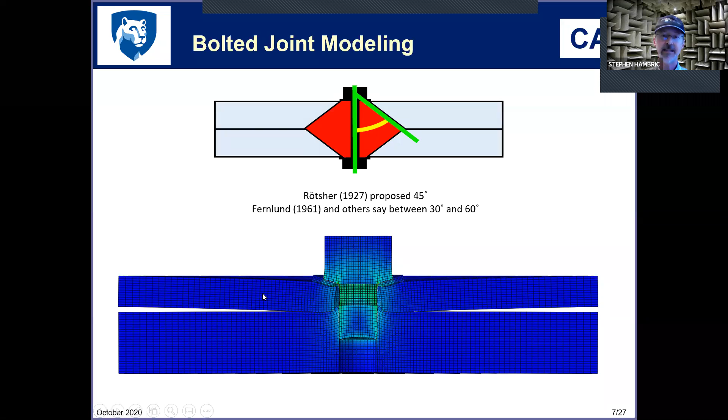You do wind up with a fairly well-connected region just around the bolt, which looks like it's got a frustum kind of shape to it. But look what happens away from the bolt. The material actually pulls apart. So you're compressing here, but you're pulling apart outside here.

And if there's an adjacent bolt a certain ways down, which is quite typical, then that would clamp down and you would have this kind of open region around it. So you wind up with all these sort of localized connected regions and then open regions elsewhere, which was frankly a surprise to me when we first started looking into this.

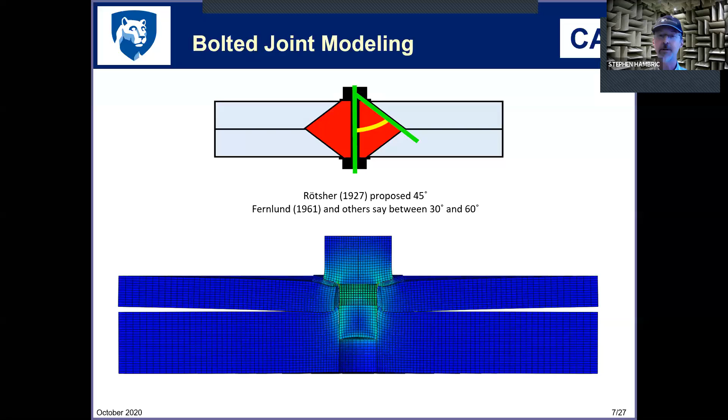So what Trevor wanted to do was go through and predict this sort of behavior and also measure it. So he did a bunch of measurements, starting with just looking at the contact pressure region. What does that contact region look like? And he did those measurements using an ultrasonic probe.

And so here are a couple of plates with a bunch of holes in them, and you can kind of see where we did most of the bolting. These actual holes are in fact for pins to make sure that the structure didn't move as we were doing the testing. And we had a kind of a control opening here where we didn't have a bolt, and then the bolt over here on the right, because when you use ultrasonics, you never get a perfect measurement.

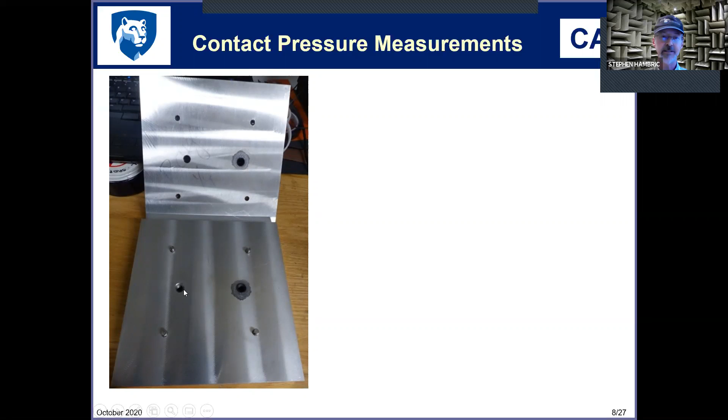The whole idea here is to take a probe, and now we're looking at the plates bolted together along the side, and then run the probe along the surface and get a 2D scan of what the contact pressure looks like over this entire region. And what you find is that you get a highly localized contact region around the bolt and then very little contact elsewhere. And the way you can tell that is by looking at the reflections that come off of the surface.

And if you get a strong reflection, that means you do not have a whole lot of contact. If you get a weak reflection, that means that the ultrasonic wave goes all the way through to the bottom of the total bolted assembly and comes back up the other side. And so what you're looking for is essentially the reflection from the interface. So you can tie the strength of that reflection to how tightly bonded that surface is.

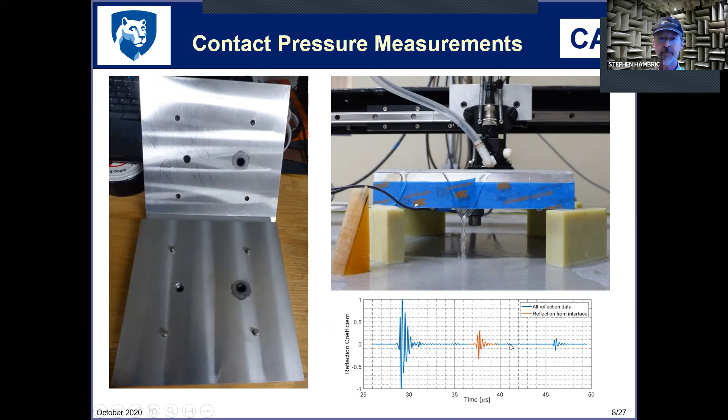And when you do these scans over the whole surface and then do some manipulation with the ultrasonic reflection coefficients, you can get these nice contours of what that region looks like. So on the left is what you get when you have no bolt at all. And so the reason we include this is it's an ultrasonic probe. The waves disperse a little bit when they're sent in. And so you don't get this perfect reflection. You wind up with kind of a smeared reflection.

So when you look here where there's no bolt at all, you wind up with something that looks like you got something along that bolt, but you really haven't. So we want to compare that to what's happening along the bolted region. So here you wind up with very little reflection along certain regions, very high reflections in others, and you get a highly localized contact region here. And you can convert that to an actual pressure.

And once you have the pressure, you can further convert that to something called an interfacial stiffness, essentially what that localized spring constant looks like around the contact region. And so the way Trevor's plotting this is we start at the origin, the center of the bolt hole, and then move out to the edge, and then continue on beyond that up to about 3 radii.

The black is essentially your noise floor. That's what you get without a bolt at all. It'd be over here to the left. So this isn't real. This is just an artifact of the ultrasonic measurements. But over on the right, the colored dots are what you get around the bolted region. And you get a much higher stiffness as you get closer and closer to the center line. That's where the pressure is highest. And as you move further and further away, the pressure and the corresponding stiffness go down even more.

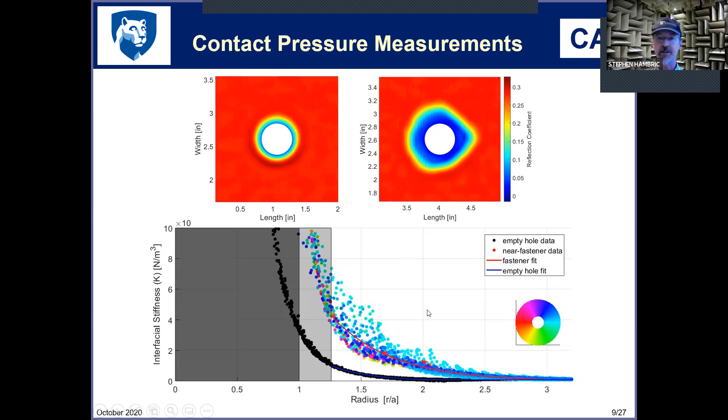So the next set of tests he did, and we're actually showing you simulations here because they're easier to visualize, is of 2 bolted plates. And so we built 2 of these with different lengths and different flanges. So this is in fact 2 different flanges bolted together at 2 locations. Trevor did a bunch of modal tests on these plates and pulled out the resonance frequencies, but also pulled out the damping. And I'll show you in a minute that he looked at what happens to the frequencies as well as the damping when you vary how strongly you excite these structures.

And as we looked at the results, it became pretty clear that we had 2 types of modes and 2 types of behavior at the joint. And so this first type of behavior is just a bending motion. And if you zoom in on the flange, I've got a bolt here, we're just showing one of the bolts. As the plate vibrates, you wind up with this sort of slapping region here. In this particular instant in time, as the mode shape is pulling down the ends, the flange pulls itself apart. And we don't have it shown here, but if you move forward 180 degrees in phase, these ends will move up and this region will slap together.

And so that's a nonlinear response. And so you wind up seeing these periodic impacts in that first bending mode when you get it moving pretty strongly. And then the stuck region, what we're calling the no-slip region, is right here, really close to the bolt, as we showed you with the contact measurements.

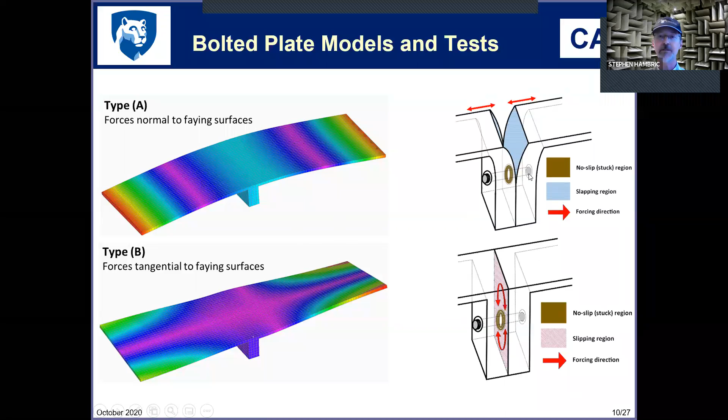So we looked at various ways of modeling those kinds of joints, and you can do them using those crazy detailed nonlinear models I showed you a couple of slides ago, but that is very painful and not something you want to do. And so Trevor went through and evaluated several different simplified linearized ways of modeling the joints, in particular the bolt spring constants.

And you wind up with springs for the bolt itself, and then you wind up with another spring along that contact annulus as well. And there's different ways of modeling those, and I'm not going to go into the details, but Trevor tried a whole bunch of them and arrived at one that he liked the best. And if you're interested, you can look for the thesis. If you go to the CAV website, we have a link to student theses, and if you just plug in Jerome, it'll pull up a link to his thesis you can download and have a look at all of the different models that go behind these curves.

But the way they were evaluated is you put the experimental frequency on one axis, we chose the X, and then his model frequency on the other, we chose the Y. And then if you have perfect agreement, then you wind up with a line that essentially just runs down the diagonal of this plot. Of course, nothing's perfect, but some models work better than others. And again, have a look at the thesis for the model that worked best for Trevor.

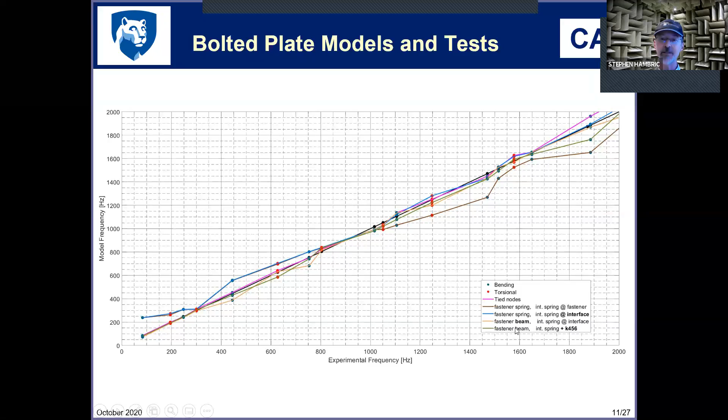A big challenge that he never did come through was looking at how the damping varied with vibration amplitude, as well as the preloading that you apply to the bolts. So I think I mentioned that it's quite common to torque up your bolts to about 2/3 yield, but not everybody does that. So Trevor went through and looked at 3 torques: low torque, medium torque, and high torque, and he defines that in the thesis.

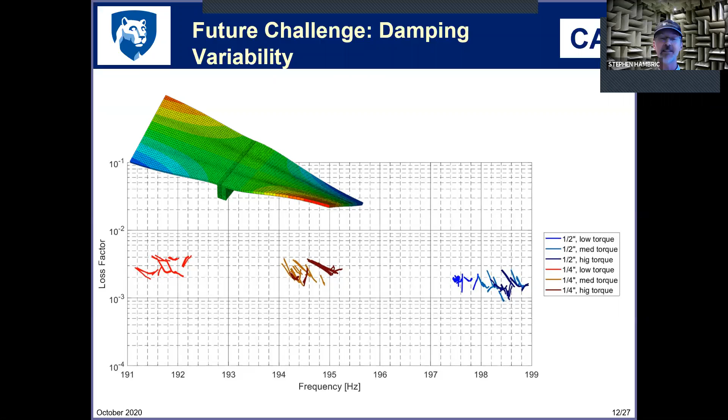And I will give you one thing that he discovered is that the variability that we see in the damping is less than the variability we get when we take the things apart, put them back together, and repeat the measurements. So there's just uncertainty and variability that you get just by different instances of bolting the structures together. So there's still a lot to learn and figure out in this particular area.

Our next highlight is from Steve Wells, graduated around the same time Trevor did. And we thank Carrier for sponsoring his research on large chiller noise and vibration. And when we first started this work, we had originally kind of laid out all this travel that Steve would have to do to go back and forth between various Carrier sites and Penn State.

And I was actually talking to a colleague of mine at Penn State, recently retired, Damian Rose, who works in a physical plant. And I was telling him what was going on. And he said, we've got tons of Carrier chillers out at our West chiller plant. And sure enough, we did. So we went and talked to the chiller plant folks, and they were extremely gracious and said, absolutely, you can put a bunch of sensors on one of our chillers. In fact, here is the workhorse chiller that's on all the time. Sensor that one up and do all the measurements you want on it.

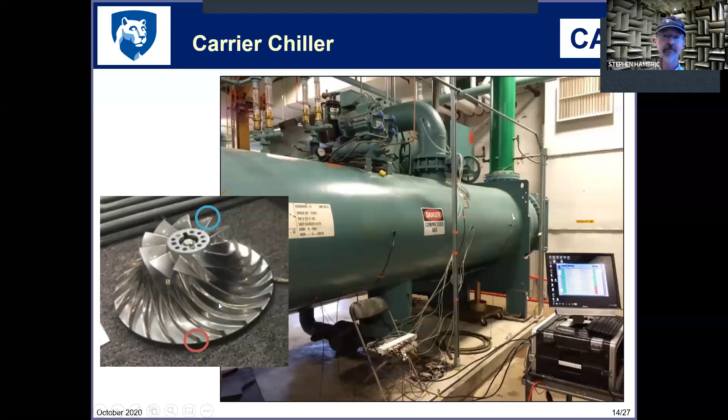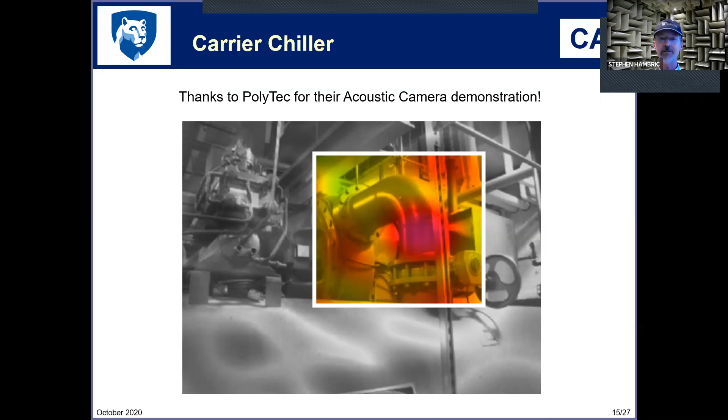Early on in the project, we were visited by our friends at PolyTec, and they were marketing something called the acoustic camera. And we asked them, hey, do you mind running out to the chiller plant and aiming this camera at one of our chillers? They said, absolutely. And with Steve, they went out and aimed all around and focused in on one hotspot which wound up being the bottom part of the discharge pipe. And we saw extremely strong 2 times vane passing frequency tones coming off of that pipe. So it was just a smoking gun of where to look. It's not where all the noise comes from, but it is a dominant source.

And what we found is that the frequency ranges of interest here were just full of discrete, lightly damped resonances. There are resonances throughout the discharge pipe, but we're showing you here measurements that Steve made on the bottom part of the pipe, which is where the camera pointed us to. And he made a bunch of plots like these, and you'll see them throughout his thesis. If you go to the CAV website and punch in Wells or Chiller, you should be able to find the thesis. But the plots all look like this.

We have structural mobility over here on the left, and that's in black. So we see the resonances nice and cleanly, and he's put some mode shapes right above some of the key ones here. The numbers correspond to the mode order. So this is 1 half wave along the length of the bottom part of the elbow. And then 4 means 4 waves around the circumference, so an n equal 4 pattern. Here's n equal 5, here's n equal 6. And if you keep going, you get to 7, 8, 9, 10, etc.

On the bottom in yellow is a surface to acoustic intensity transfer function. This is essentially taking the intensities measured in the microphones and ratioing those to the surface average vibration of the pipe itself. And not surprisingly, you wind up seeing these strong peaks at these particular resonances. So why is this important? Because if that vane passing frequency happens to line up with one of these resonances, you're going to see a big amplification of vibration and radiated sound.

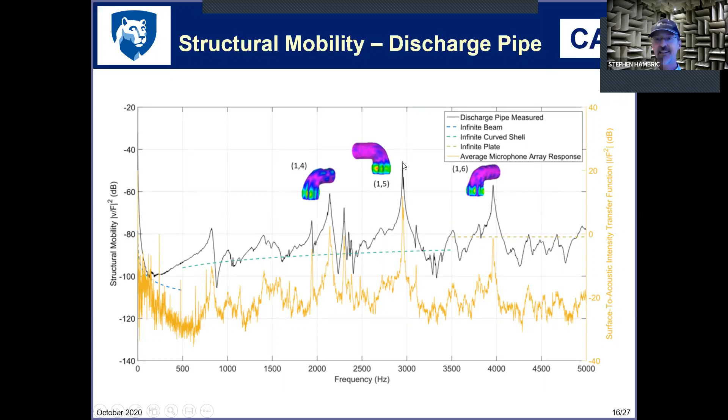Broadband noise does come off the condenser shell, and it is dominated by a hump in response that corresponds to the ring frequency of the shell itself. And the ring frequency is just computed by looking at the overall circumference and the speed of sound in the steel.

And incidentally, I did a separate talk about ring frequencies and some of the infinite shell and plate curves you're seeing on here, which I won't go into now, at last year's CAV workshop. And those presentations should still be available online. If they're not, or you can't find them, let me know and I can point you to them.

Once again, we've got the structural mobility, and it looks kind of flat. It ramps up a little bit here. Looks a bit like a beam at low frequencies, and eventually it looks like a shell at others. But at a pretty low frequency, the shell curvature just becomes small with respect to a wavelength, a bending wavelength, and it looks just like an infinite flat plate.

The purple curve is a more interesting one. That is, once again, the acoustic transfer function, so intensity divided by surface vibration. Embedded in that is the radiation efficiency of this shell. And now you can see this clear ramp up to a big hump where the shell radiates extremely well between about 1 kilohertz and maybe about 2 or 3 kilohertz, maybe 2.5.

So that's kind of a sweet spot for the condenser shell radiation. So if you get a tone in there, it'll be amplified. But also we see some broadband noise coming out of the compressor that gets amplified by here as well.

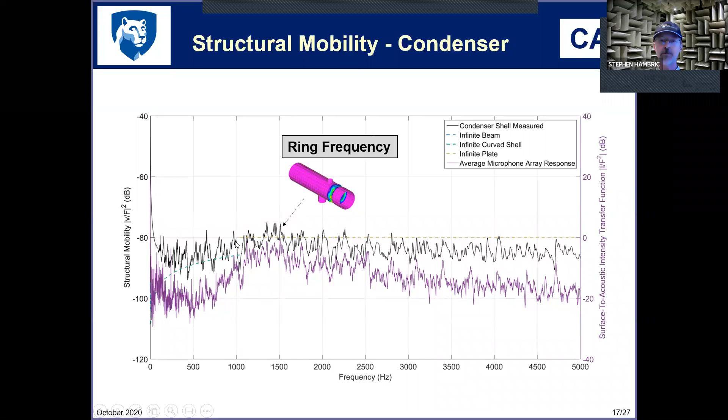In particular, some of the radiated sound transfer functions you saw a minute ago, those are all based on testing. Steve going out there with his trusty hammer, measuring vibration, measuring microphone behavior, and then coming up with radiated sound transfer functions.

One of the big things he had to do was back out the forcing functions, because we did not have a first principles way of doing that either. We were, however, able to combine a bunch of transfer function measurements and operational vibration measurements at the interface between the compressor and the discharge pipe itself. And they were able to back out what the structure-borne and the fluid-borne forcing functions had to have been to give us the observed vibration.

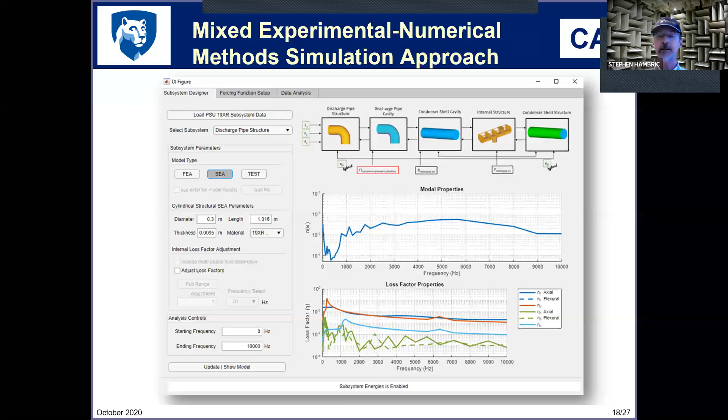And he was able to prove that by going through and comparing simulations, pseudo-simulations, again, it's a big hybrid model, to what was actually measured, and did that for several different cases. And so up here, we've got the discharge pipe vibrations, and the measurements are in these kind of light dashed red curves here. And the blue is a model output.

And then we put plus or minus about 3 dB on the measurements for variability. Nice agreement, not perfect, but pretty doggone good, considering how complicated the system is. Down at the bottom, we've got the condenser structure. Once again, measurements with a spread.

And then in green is the pseudo simulations. The peak you're seeing here at around 3 kilohertz, this is in 1/6 octave bands. That is the fundamental tone coming out of the compressor. It's actually a 22 times shaft rate tone. And this is the one that's kind of moving back and forth between the resonances of the discharge pipe.

And then finally, we've got radiated sound down here. And once again, a nice agreement between the measurements and simulation. Bit of a difference up at higher frequencies.

Pardon my dog. It's the fun of doing live presentations here.

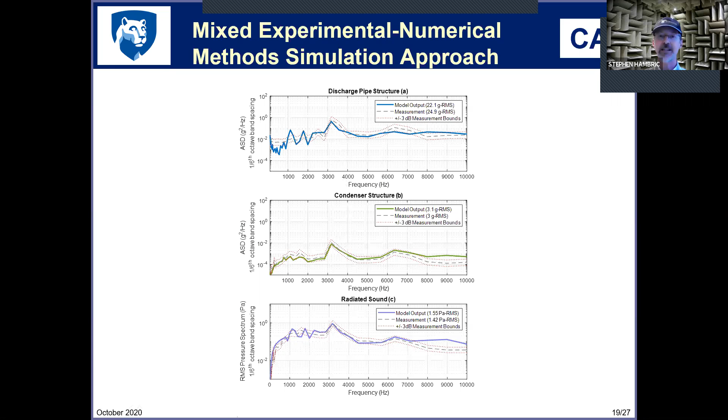But a very nice agreement here. And if you go to the thesis, you'll find a bunch of cool what-if studies, or what if you change this, what if you change that. Just as with the last one, I had a future challenge that was on damping. Here, the future challenge is on off-design assessments.

So here, all the data points that Steve collected between June and October. Looks like it took a break in August. And each of these little symbols corresponds to a different flow head ratio. And so this is looking at the fraction of the flow as a function of on-design flow rate. So on-design flow would be right up here at 1. So you come up here. And then head fraction up here, completely on-design head would be up here. We don't actually have any points up there, which is kind of interesting.

This green line is purely on design. So I guess the head fraction is maybe a little bit off there, but this would be where your blades of the compressor are aligned perfectly with the inflow, so you got optimal efficiency. And you're not at that point very often. Right? In fact, quite often you're under it. You're putting out less head for a higher flow rate. So this is the off design point. The reason you're typically under it is going over, you might surge, and that's a bad thing for compressors. And so this is a quite common distribution of operational points.

So we've got vibration and sound data at every one of these points. Really not a whole lot of it looked at, just not enough time. Steve was fortunate enough to come through getting the on-design part right. And so we're having conversations with Carrier now about what we can do with this, looking at how bad the vibration and radiation can get. What are the worst case conditions? Can you avoid them? Can you use artificial intelligence and machine learning to perhaps look at where the worst cases are?

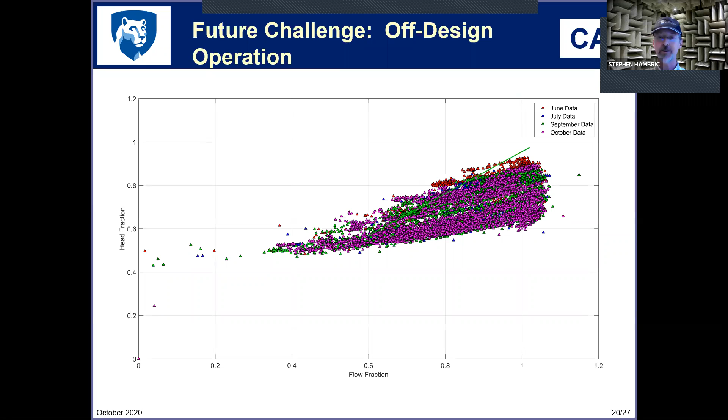One more update, and actually there's a short one at the end of all this, and this is work done by Gage Walters, advised by Andy Wixom and Sheri Martinelli. It's also sponsored by NAVSEA. Gage actually did not go to work for NAVSEA, went to work for Johns Hopkins, but still a good place to land. And his big research project was looking at uncertainty quantification.

This is always something we get asked by our sponsors. You're giving us predictions. How uncertain are the predictions? And we've never had a great way to answer that question. And Gage went through and did a nice job in helping us get there. So let's show you an example. And this is looking at a plate that is excited by turbulent boundary layer flow.

And the plate that he looked at was something that a fellow named Maestrello examined way back in the 60s and 70s. Well understood plate, pretty high speed flow, a Mach number of about a third. And some of the stuff you're seeing down here are parameters associated with the boundary layer itself that you need to capture the forcing function appropriately. There's plenty of empirical models for boundary layer forcing functions, and these parameters get fed into those.

And the mission here was to look at first vibration and then radiated sound. Maestrello put these plates in a wind tunnel, but put an anechoic chamber right below the plate so we can measure the radiated sound fairly accurately.

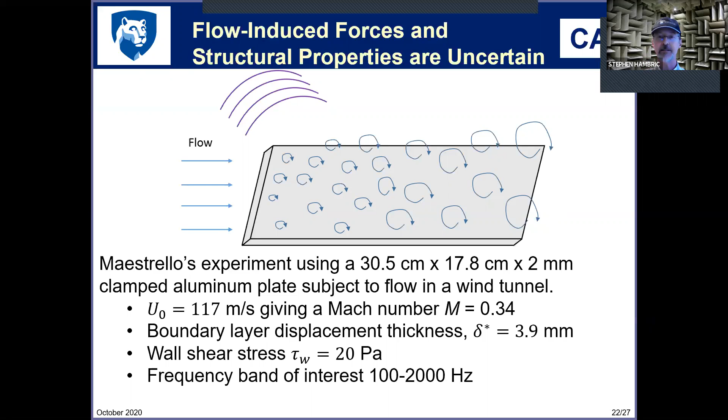So how do you handle uncertainty? I mean, all of those boundary layer parameters I mentioned a minute ago, they're highly uncertain. I said empirical models, they're very empirical. We really don't know for sure how to model a boundary layer induced forcing function. You can try it with like really advanced CFD methods, but that's awful tough. Hence using empirical models. But all of the empiricism, it's highly uncertain. How fast are the turbulence eddies flowing inside that boundary layer? That's kind of up in the air. How correlated are they over space?

Again, there's models that are fit to measurements, but there's a ton of scatter in them. The boundary conditions on the plate itself, you bolt this thing down and that's uncertainty. That leads to uncertainty in damping. The material properties are uncertain. So I've rattled off like maybe 5 or 6 uncertain variables right away.

And typically the way you would do this in the old days was using something called a Monte Carlo method. And all that means is randomization, right? So you take all your uncertain variables, decide what ranges they have. So maybe the damping in the plate ranges from 0.05 to 0.15. And you assign a variability to that. Is it a uniform variability or a normal distribution, something else? And you have to do that too.

And then you just essentially generate this insane number of possibilities over that space, over all the variables you decide are uncertain. Turn on the simulator and come back in a week or a month and then look at your results. The good news is there's much smarter methods that have been developed since then. And one of them, which we're using here, is called Generalized Polynomial Chaos. I love that chaos at the end, GPC for short.

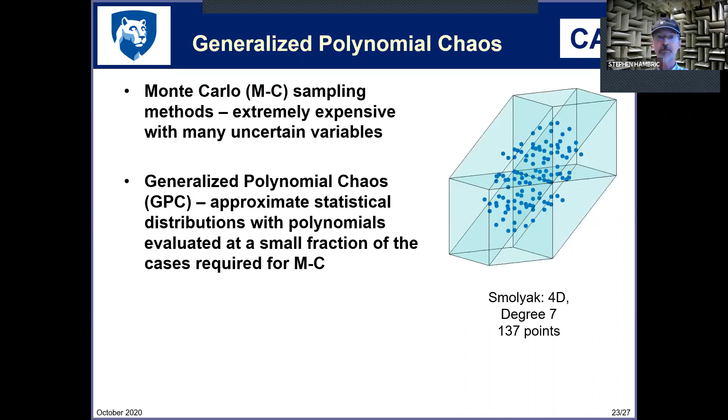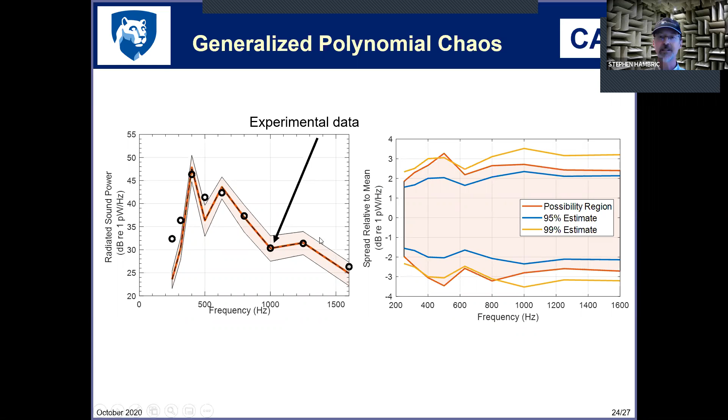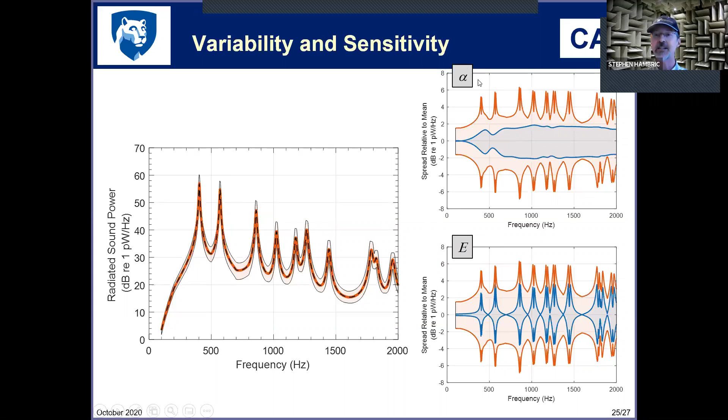So structural parameters like E, perhaps mass density, are going to give you this kind of strong variability around resonance, and uncertainty in your flow-induced forcing functions, and we could have put convection velocity on here too, give you a more broadband variability.

Okay, one final one, and this is a single slide. Cameron McCormick is about to graduate if he hasn't already. And I mentioned before that we did a short course on acoustic black holes last year. And Micah Shepherd's, one of his major research foci, is on optimization. And in fact, his thesis was on that. And so he turned Cameron loose on optimizing the acoustic black hole configuration.

So we just have a few of these, and this is just the last slide. And some of you may remember seeing stuff like this from some of our international guests that are also looking at black holes, but there's different ways of doing it. First, what the heck's a black hole, right? This is just a zoom of an indentation in a plate. And imagine you've got a bending wave coming along here, and all of a sudden it encounters this drop in thickness. That looks like an impedance change, so you're going to get some reflection off of that.

But the other thing it's going to do is that as the thickness decreases, the bending wave slows down. So all of a sudden, where you might have had just a few wavelengths along a pretty long distance in the main plate, you've got a whole bunch of wavelengths, and the wavelengths continuously vary as you work your way down to the middle here where the thickness is smallest. So you get really tiny wavelengths there.

And then if you let it go, the waves would continue on and come out the other side. Sometimes they'll get trapped, and so maybe the vibration is less over here just because of the impedance drop and discontinuity. But the damping is what really helps you with acoustic black holes. It damps out the vibration when it's at its smallest possible wavelength. There's other stuff they can do too in radiation, but the focus here is on vibration.